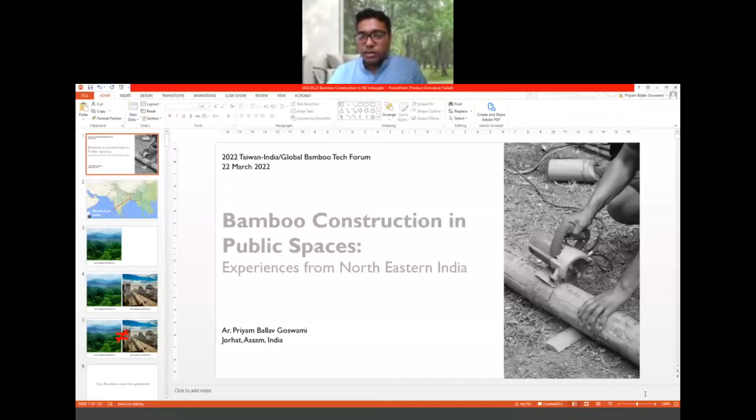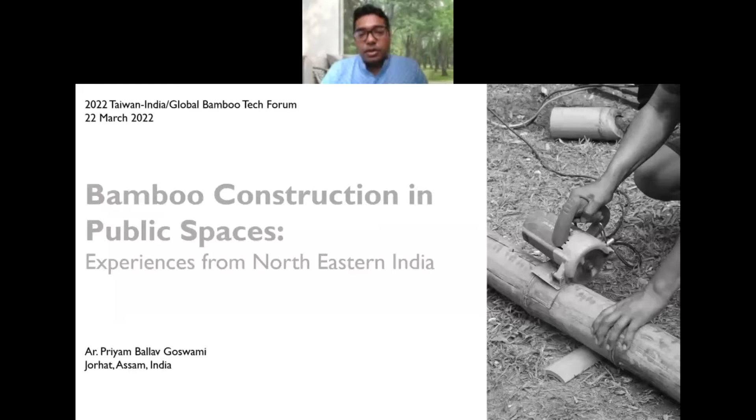Okay, great. So I'm going to speak very briefly about our experiences in bamboo construction, and I would like to focus on the bamboo construction that we have undertaken in public spaces, concentrated in the northeastern part of India.

However, the urban landscape of the cities in Northeast India is quite in contradiction to what the natural landscape is, and there is a big disparity between the two. We are trying to find a solution through bamboo, if possible, if bamboo can be used as a solution to this trend of industrial materials taking over mainstream civil construction.

To do that, our first objective is to make bamboo more visible and more acceptable to the people, because bamboo nowadays is not a very glamorous material. Although traditionally, for thousands of years, bamboo has been used for construction all across northeastern India, as in other parts of the world where bamboo is available, of late it has gone out of trend. It doesn't seem the right material to work with because of many issues.

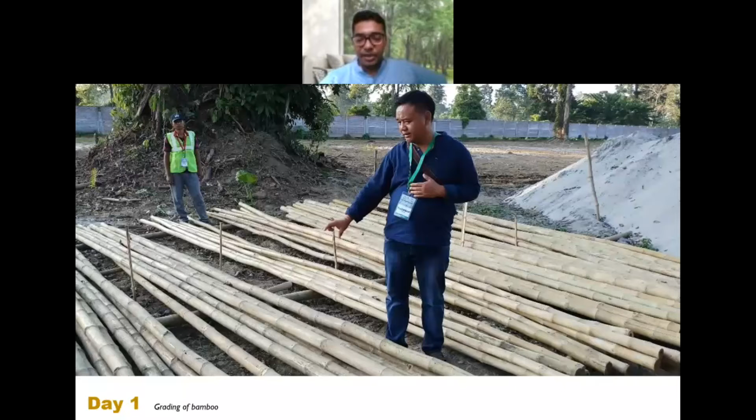We talked about the treatment of bamboo by drilling it and then through this vertical dip diffusion technique, where the bamboo was kept upright on a tree, and borax solution was poured onto it, treating the bamboo. In this case, the bamboo used was Bambusa balcooa, which is quite available in Northeast India, especially in Assam, and is quite good for construction.

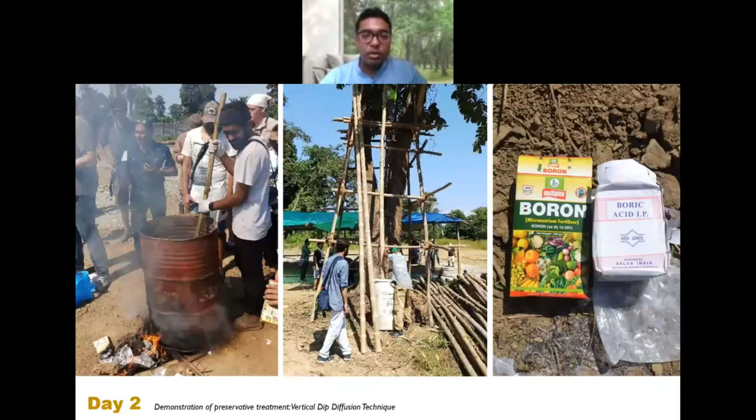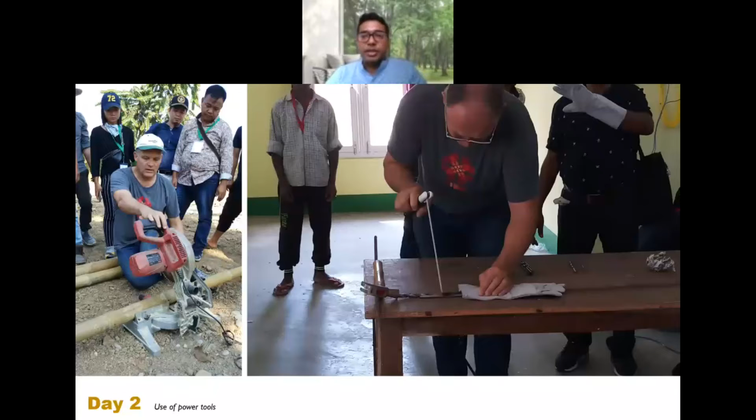The washing and cleaning of the bamboo was very important. Then there's Jörg Stamm, who was teaching us about the use of power tools and customization of those tools to fit our requirements, and about making loops using nylon ropes.

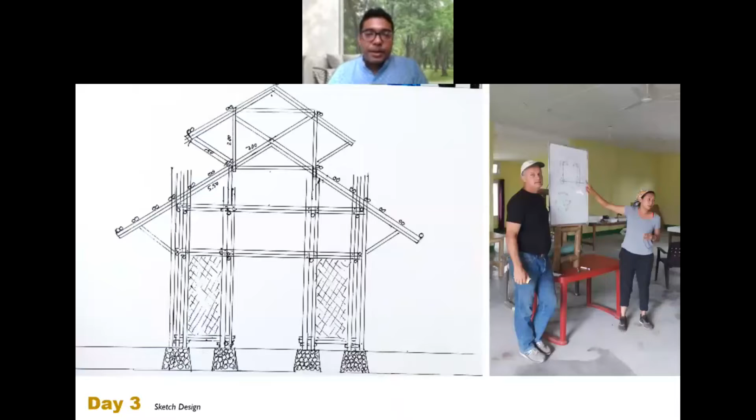Based on this, we prepared a computer model of the structure to get the exact measurements of the bamboo pieces to be cut. This is how we found the exact measurements, and accordingly the bamboo was measured and cut.

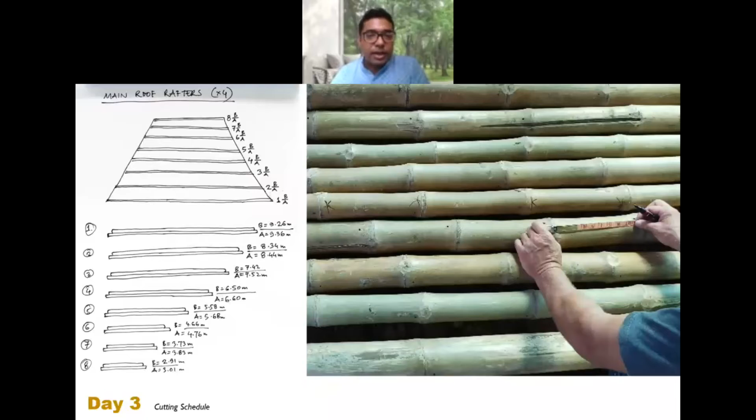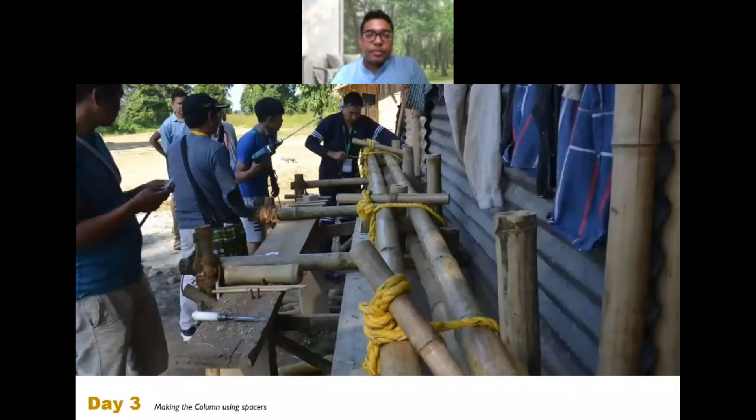Jörg Stamm also taught us the use of bamboo nails and how it can replace steel bolts in construction. He helped us set up the workbench, and we started using these columns of bundles of four, and the beams using diagonal nails.

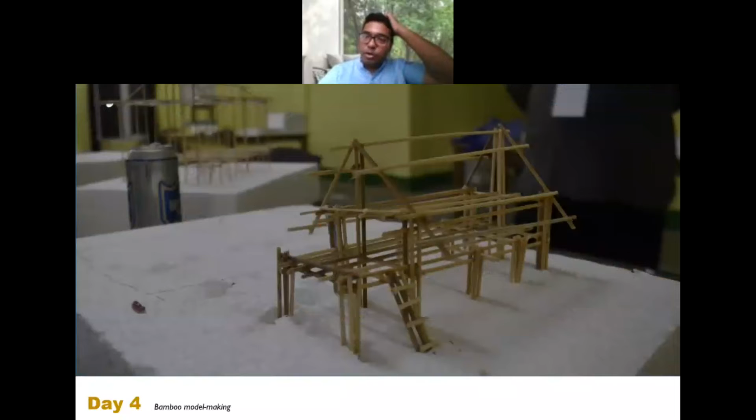We also created some bamboo models using sticks just for experimentation purposes. We had some fun as well, creating some interesting parametric structures to understand the modern usage of bamboo.

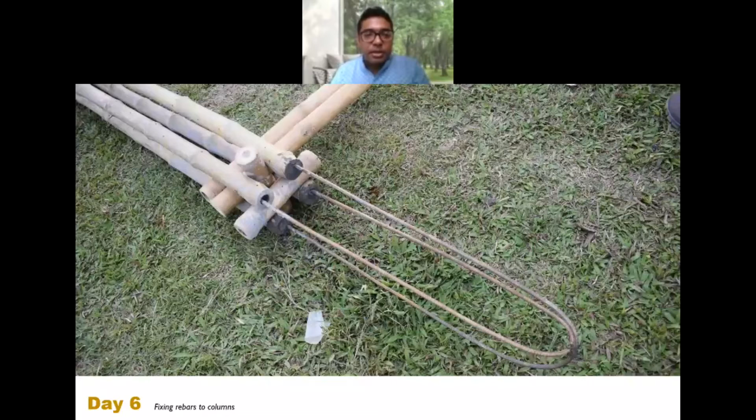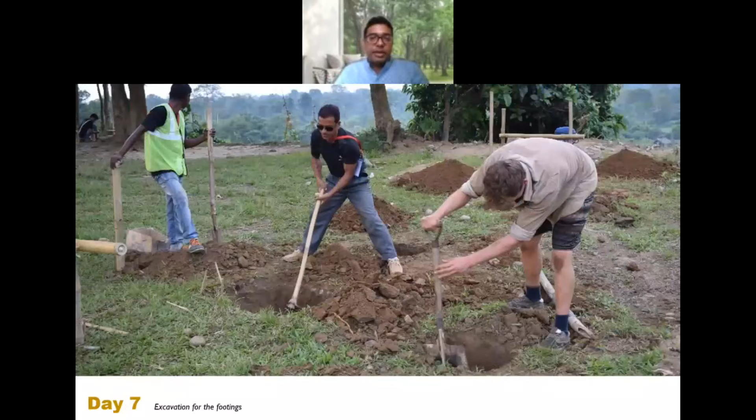We also started fixing the rebars to the columns for laying the foundation. This is how it was. All the measurements were done at site, the excavation was done, and then this is the treated bamboo being taken out from the diffusion tank.

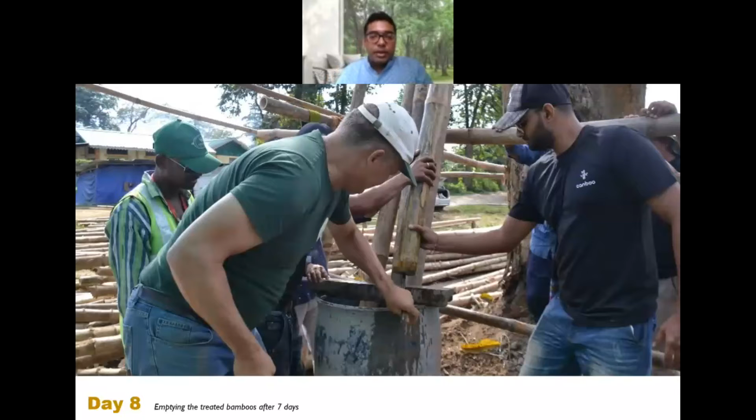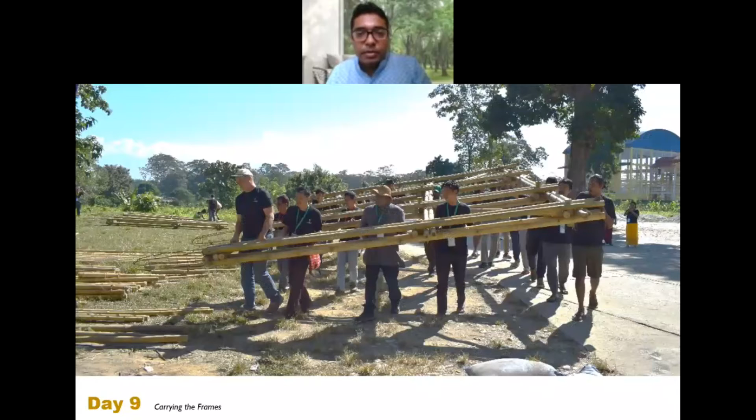The frames were prepared, and these frames were so lightweight that they could be transported by us participants carrying with our own hands. We transported them to the site and erected it there. This is how we did the erection.

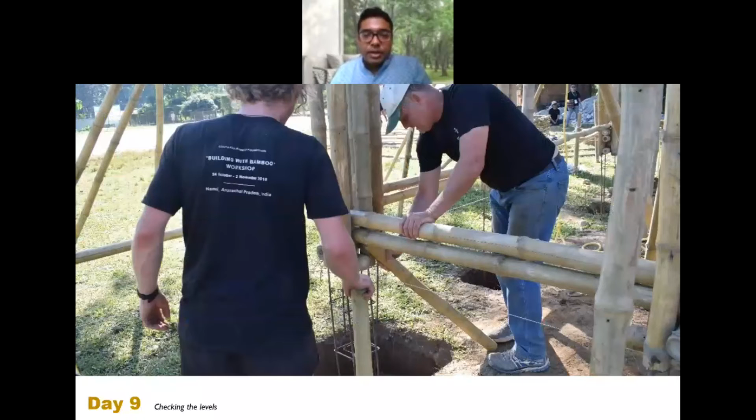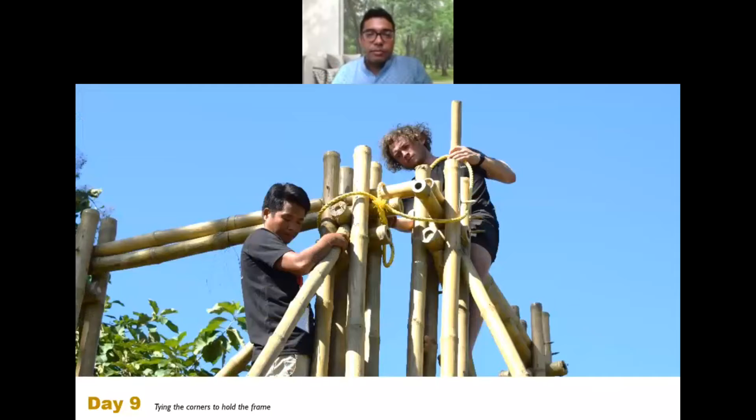The levels were checked, and then the concrete was poured for the plinth. The alignment of the superstructures was ascertained, and then the frames were tied up. The structure was set up.

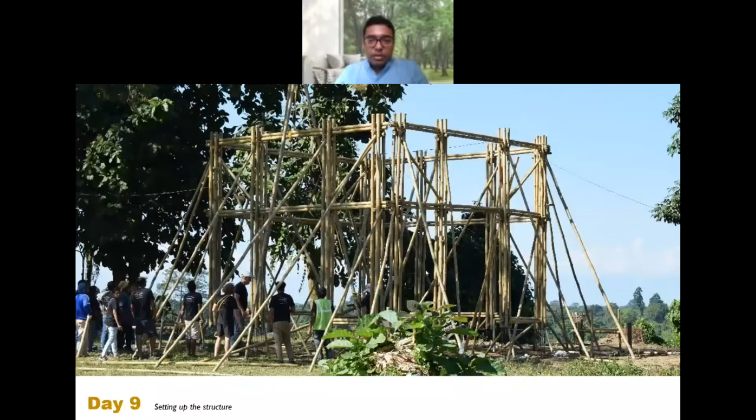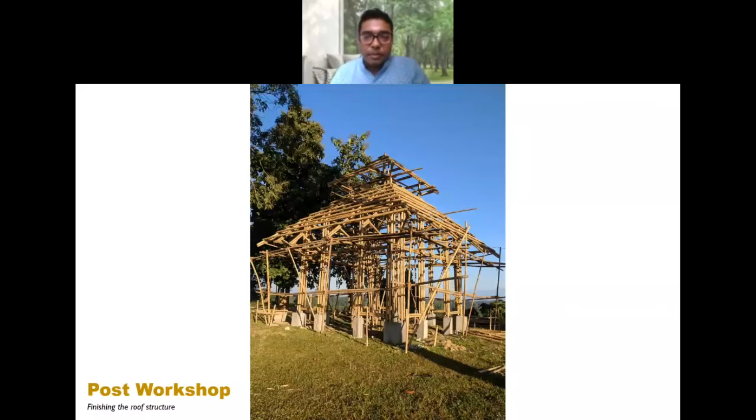This is the main frame of the structure that was done, and later on, this is a part of the structure that was done after the workshop was completed, because we had a limited amount of time. But then the thatching was done on the roof.

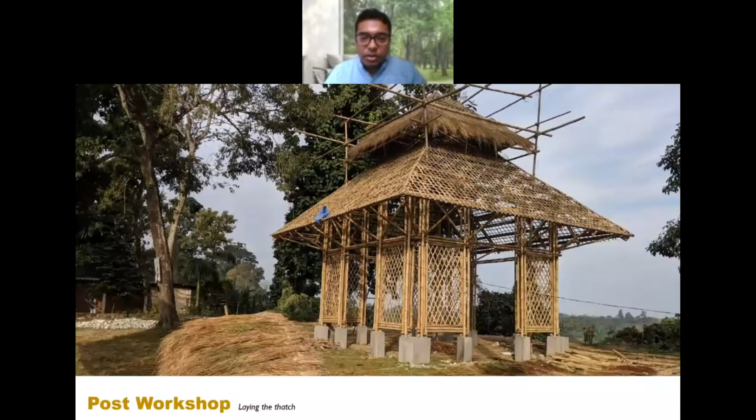This is the completed structure that you can see with all the thatch roof, and the plinth is in concrete. This is how the inside of the structure feels. It's very cozy, very airy as well, because it's open from all sides. It is a beautiful view.

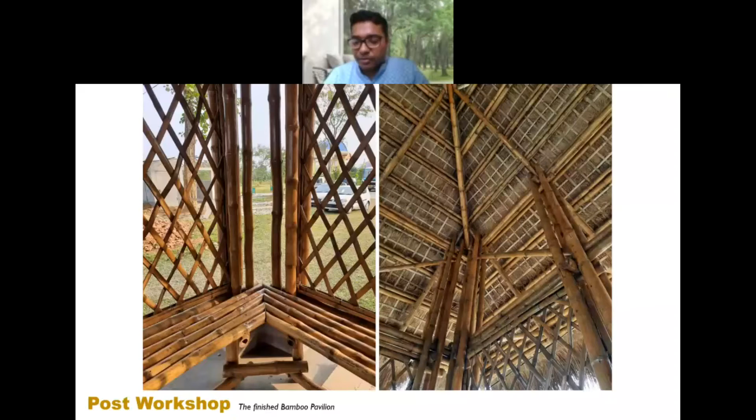And these are some of the joineries that were done. You can see that we created some benches inside, and all the roof structure, the truss frames and everything were polished and maintained.

Next, I'm going to talk very briefly about another workshop that we conducted in Manipur in 2019 as a part of World Bamboo Day.

And here our objective was to build a prototype for a bus shelter for the Imphal Municipal Authority in Manipur. We had 3 days to complete the structure.

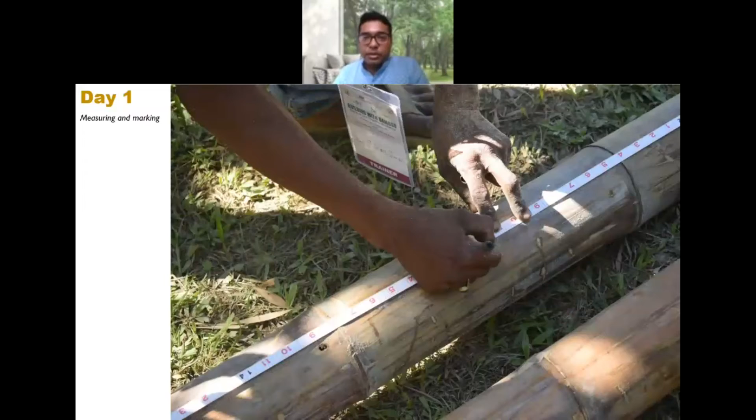to length of the structure of the bamboo poles using power tools, then washing the bamboo, float washing on a water body, then drying of them in stacks.

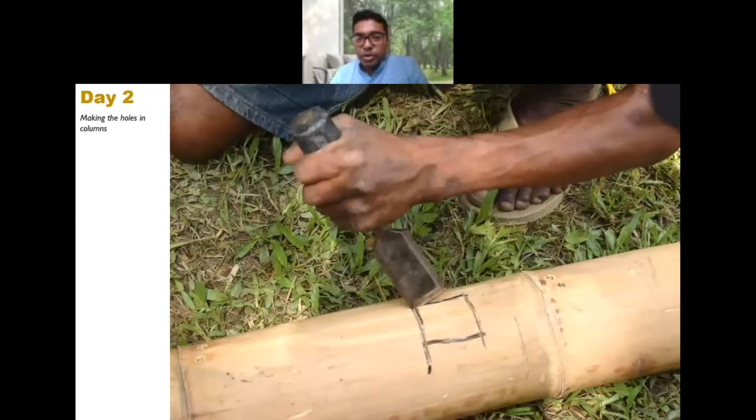Then we were erecting the scaffolding and then cutting the holes for the columns to pour the concrete in. This is how the columns were erected.

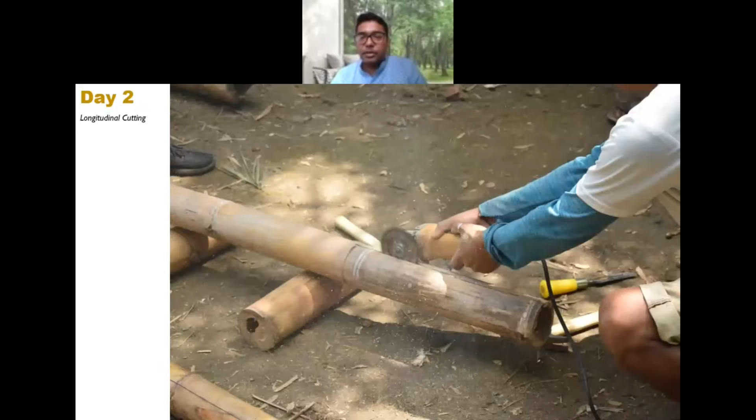Cross-cutting techniques and longitudinal cutting techniques for the joints. This is how we were creating the lap joints, cutting two pieces in two halves and then joining them together like that.

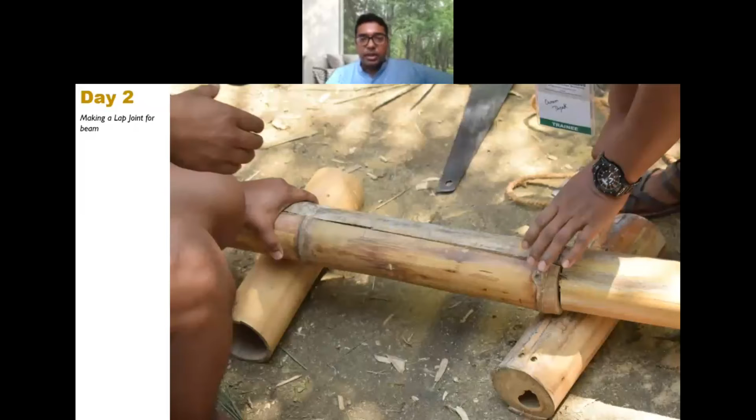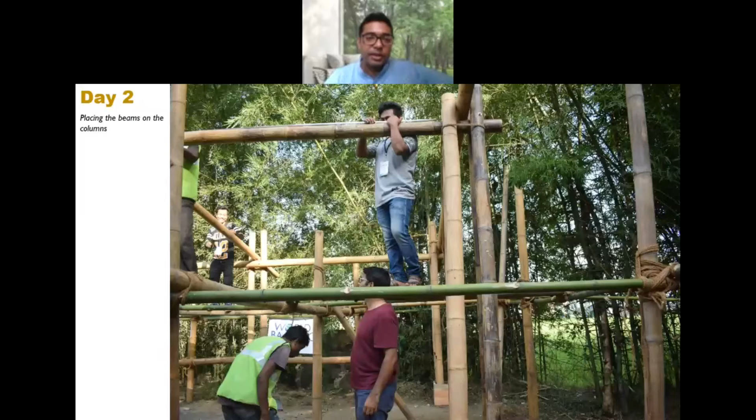We had short spans, so this kind of lap joints did work. But of course, for longer spans, we would adopt different techniques. So then again, drilling in the bamboo and fixing them with these stainless steel bolts and nuts.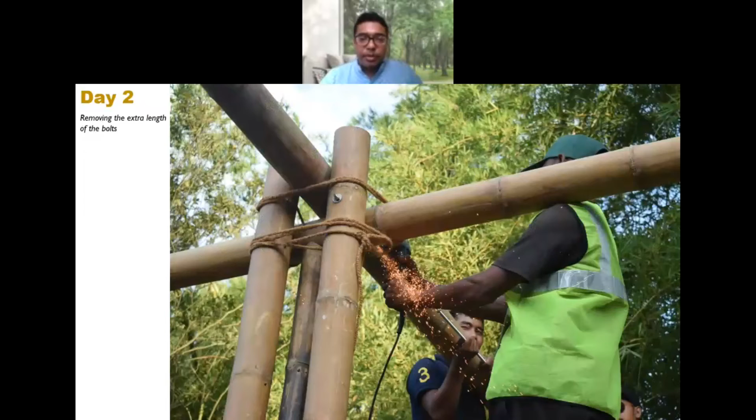This is the primary structure that was erected, the fixing of the beams with the columns. And then we were fitting the primary rafters like that. So the roof structure was also done.

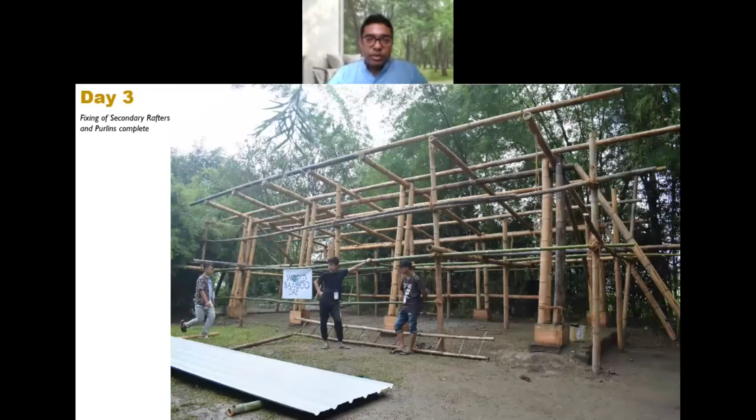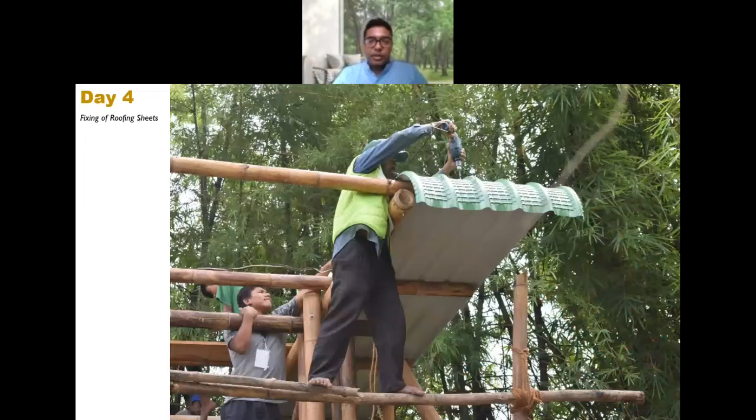Now it's time for the roofing sheet to be added. Here we were using these galvanized aluminum sheets. These were screwed to the roof structure. And the structure is mostly ready.

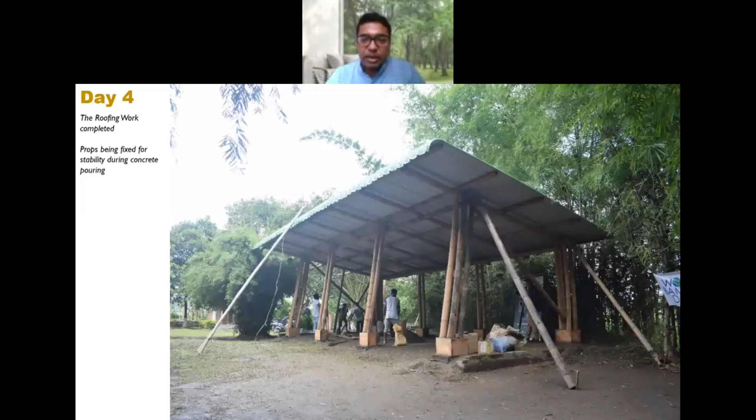We just had these props to keep the structure alignment in place. And then the concrete was mixed and poured into these holes, and daubed. On the fourth day, the structure was ready for the closing ceremony. So it was a very short exercise, very quick, and the structure was ready in no time.

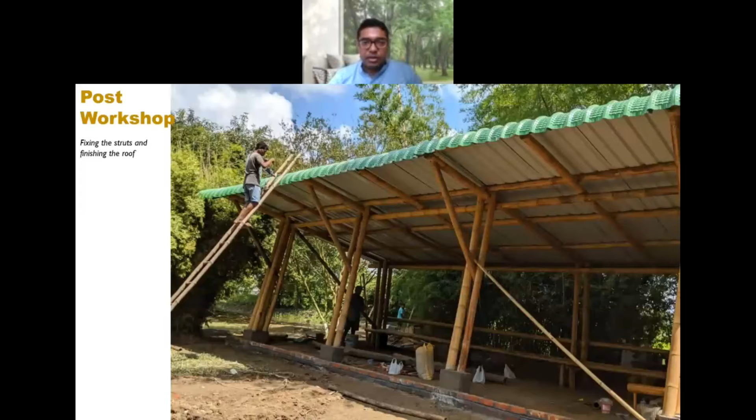This is a little bit of treatment post workshop. You can see that a bench was created inside and the roofing was properly fixed and everything. So that's how the bench is. And this is a prototype structure that we presented to the government.

Next, I'm going to talk about another project that we did for a footbridge in Guwahati city in Assam. This was for the government, and this structure was supposed to be the gateway to the city, because Guwahati city is considered the gateway to the entire northeast, and this bridge was a symbol of that.

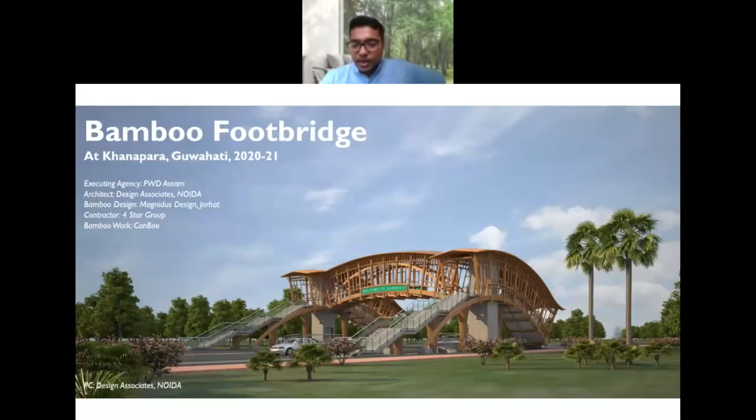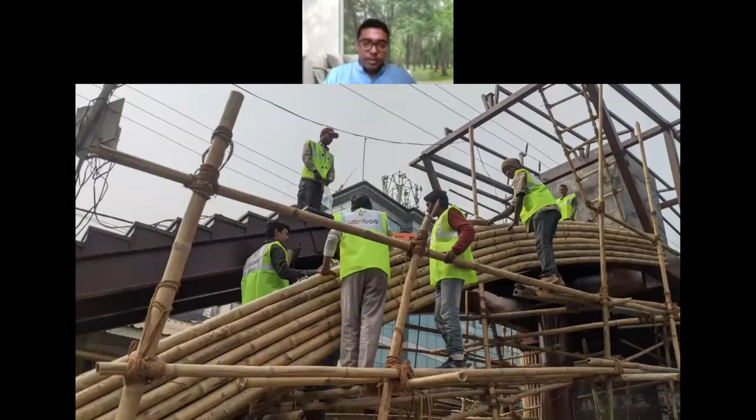This is the condition of the site when we were handed over, and you can see the steel structure was in place. Then we started cladding the exposed steel members with bamboo. Here you can see that we had welded joints. So all the connecting bolts were welded to the steel structure, and then the bamboo was accordingly installed.

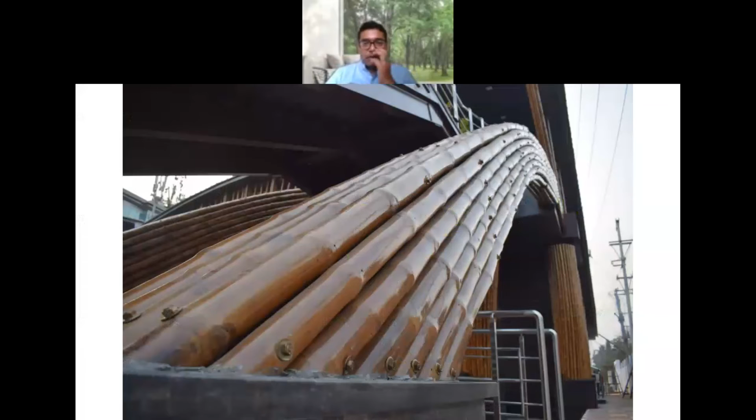This is how it came out to be. So after construction, there were some steel columns underneath the footbridge, and those were also cladded. This is the cladding process, showing how it ended up looking.

So it's a finished image, with the lighting on. That's the detailing of the base.

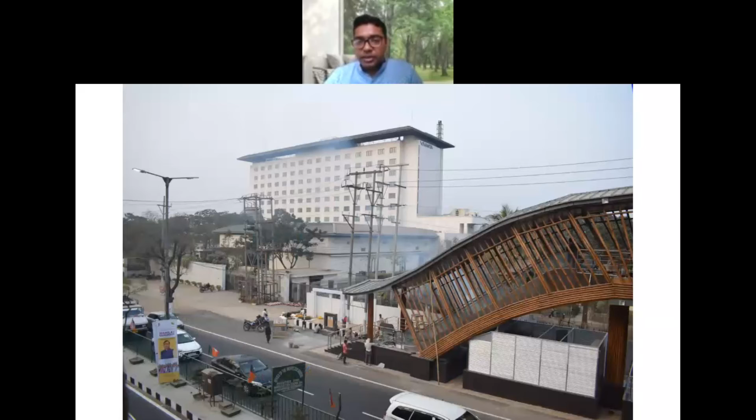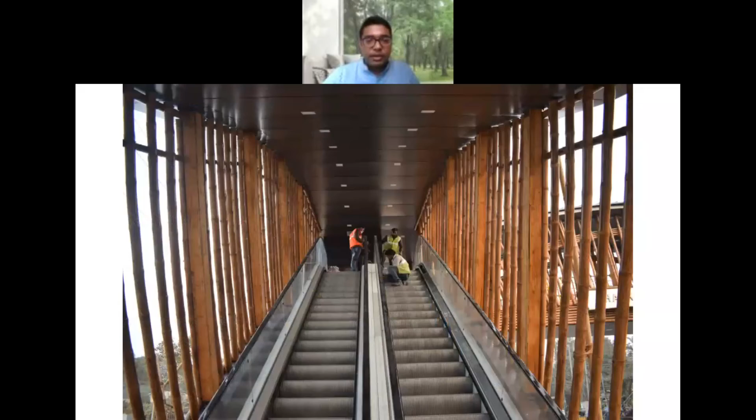There's the side of the escalator, you can see. Again, it's kind of the gateway to the northeast. There's the escalator, there's the footbridge itself with the side claddings. That's the team.

Here the purpose was to make bamboo popular in the public mindset, and I think this bridge has come a long way - it has been really successful. People have made this bridge quite viral on social media, and it's been widely spoken about on various print and electronic media as well. It's a favorite hotspot for people to hang out and take photographs, and it's also a good space to host small art exhibitions and things like those.

Then we worked on another footbridge in Guwahati, near the Sukreshwar Mandir. Here the concept was quite different, although we're using bamboo again for the cladding purpose. Here we got inspired by the temple, which was a strong context for us.

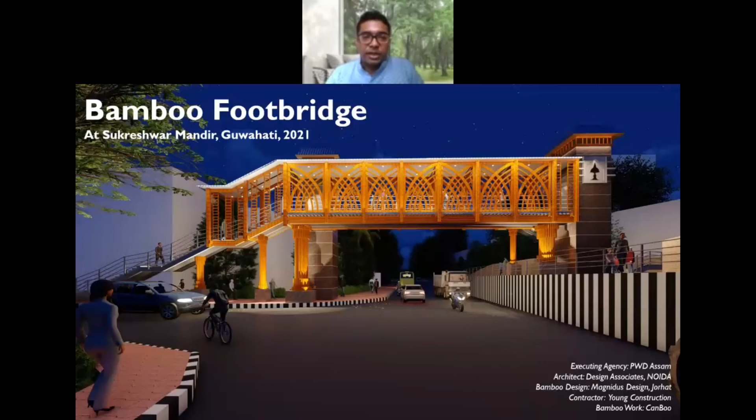So this is the Sukreshwar Mandir, and the way we started designing the cladding work or the bamboo design was based on various elements we got inspired by, already there in this ancient temple. Here you can see some of the architectural elements we picked up from the temple itself, and then we tried to reinvent them to see how it can be done in bamboo, or how it can symbolize something connected to the temple itself.

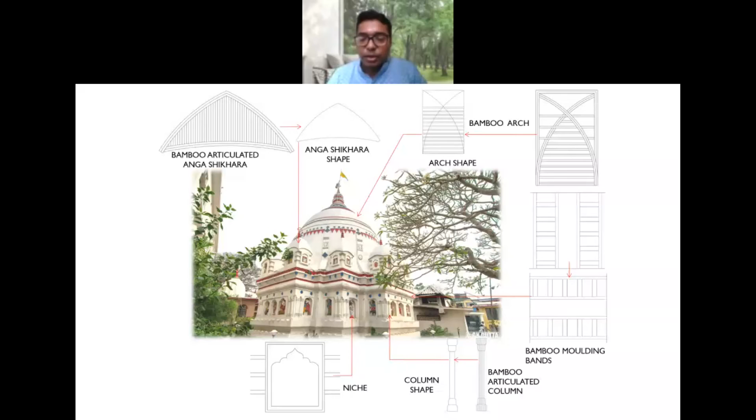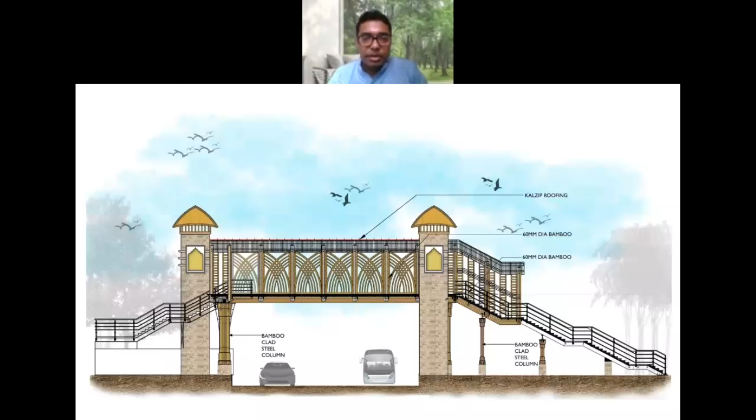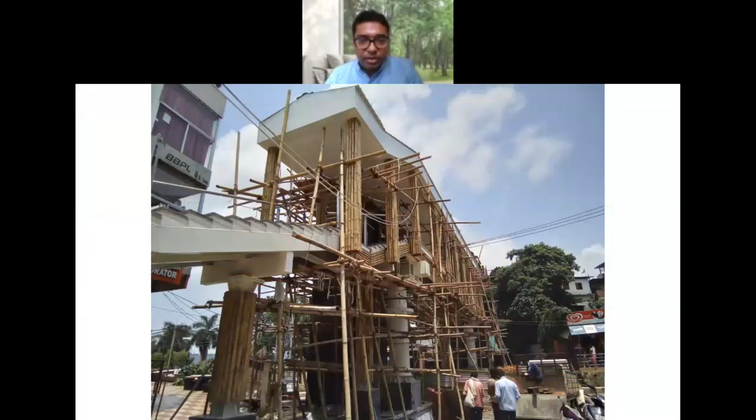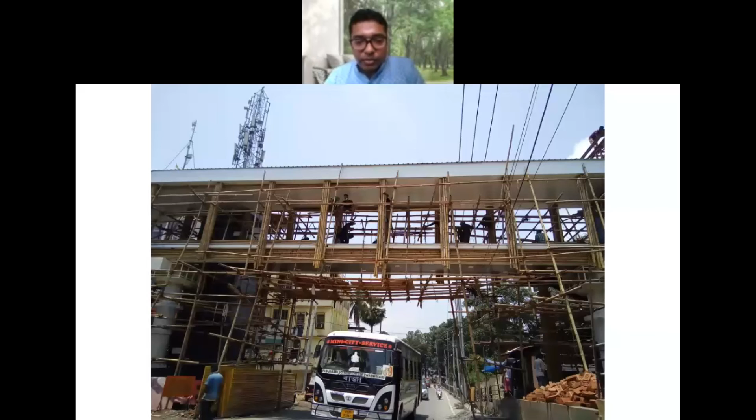This is a picture from during construction. There's the cladding work going on the columns, and you can see all this work was done while there was a lot of traffic going underneath the bridge, so it was a very hazardous work to do. There's all the cladding work going on.

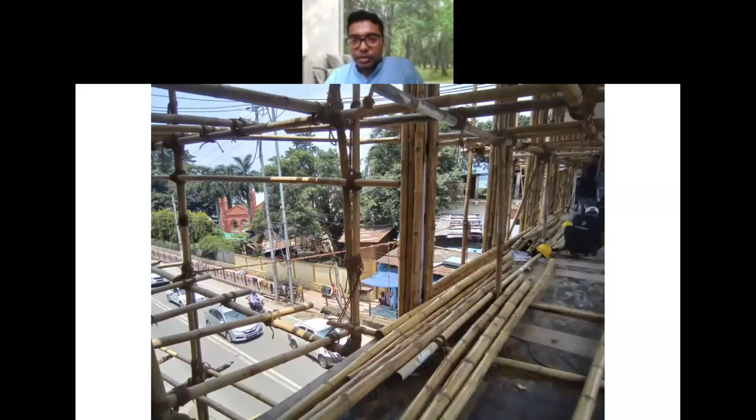I'm going to talk very briefly about another workshop that we conducted under the Green Skill Development Program of the Government of India, and here the purpose was again to reinvigorate the bamboo construction skills amongst the bamboo craftsmen of the region.

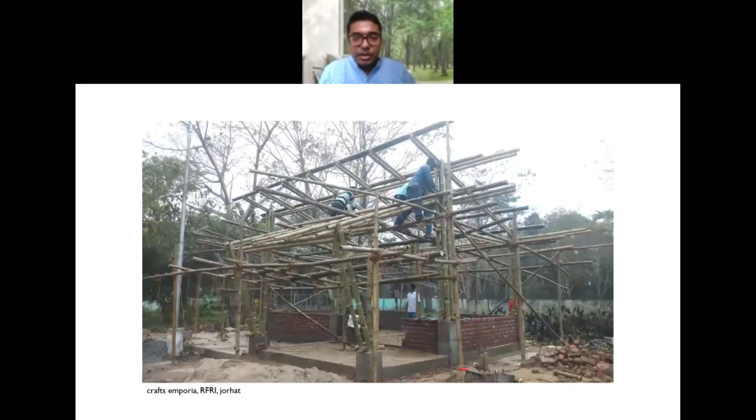So there's a structure that we built. This is a structure under construction by the workshop participants, and this is just a structure with the roofing on, and this is a finished structure.

Here again, bamboo was used for the wall paneling material as well, daubed with plaster, and bamboo mat boards for the ceiling. This was a structure used as a craft emporium to display all the craft items of the local bamboo craftsmen. It's also a demonstration structure for different applications of bamboo in construction.

We were using whole bamboo, split bamboo for the walls, bamboo wood doors, bamboo wood flooring, and bamboo mat board ceiling - different uses of bamboo in the structure.

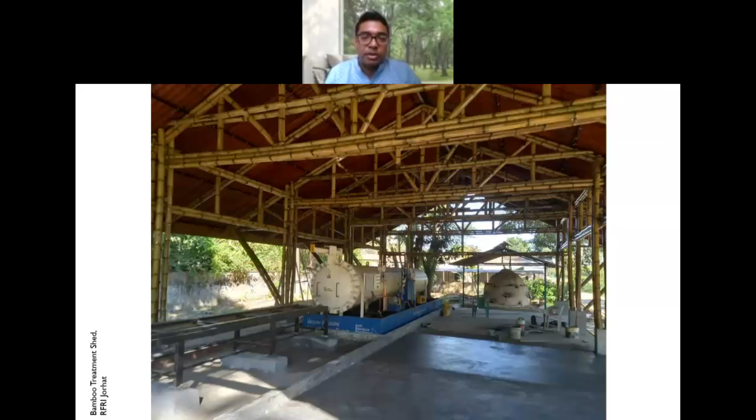So thank you everyone for your attention, and thank you for giving me this opportunity to showcase some of the works that we are doing in Northeast India. Thank you, Kameshji.